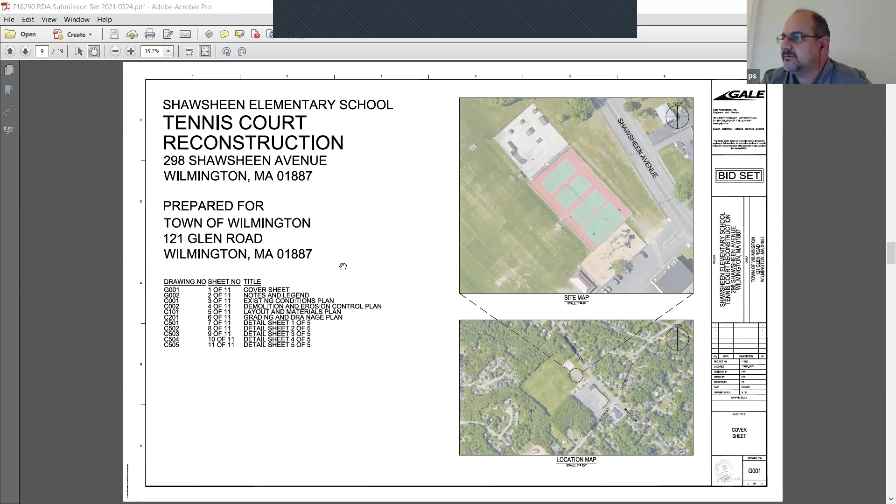So as Jamie said, the project itself consists of the tennis courts and a basketball court, as it is shown here today. It's right adjacent to the playground and skate park, next along Shawsheen Avenue, next to the Shawsheen Elementary School. The project itself is needed because the cracks have become worse and worse, and it's about time for a total reconstruction.

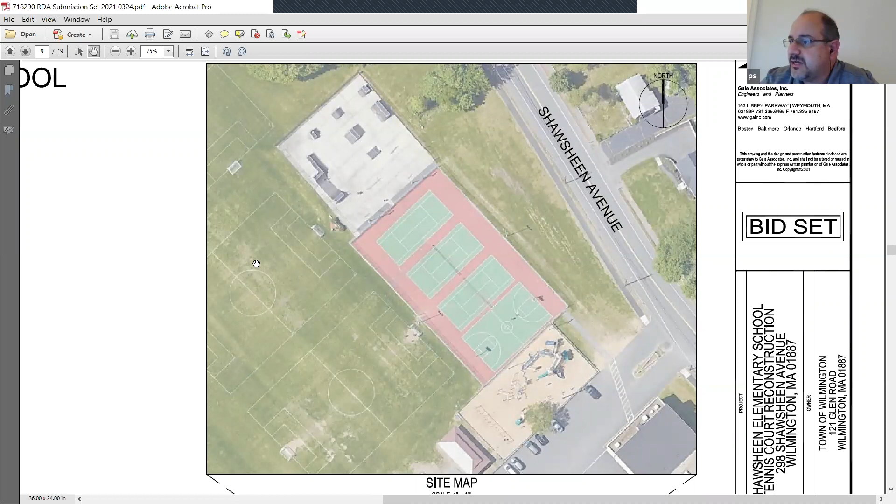The plans themselves, if I can show you the existing conditions of the site. So currently, these are the courts. Let me zoom in here just a little bit more, I just want to show you the contours of it. When they were originally constructed, they have some small insufficient area drains in the middle, and everything is crowned off the sides and bowled toward the middle.

That is not the proper way of constructing a tennis court. So in reconstructing this pavement in the same footprint, it would be our opportunity to make these courts sheet flow water as intended.

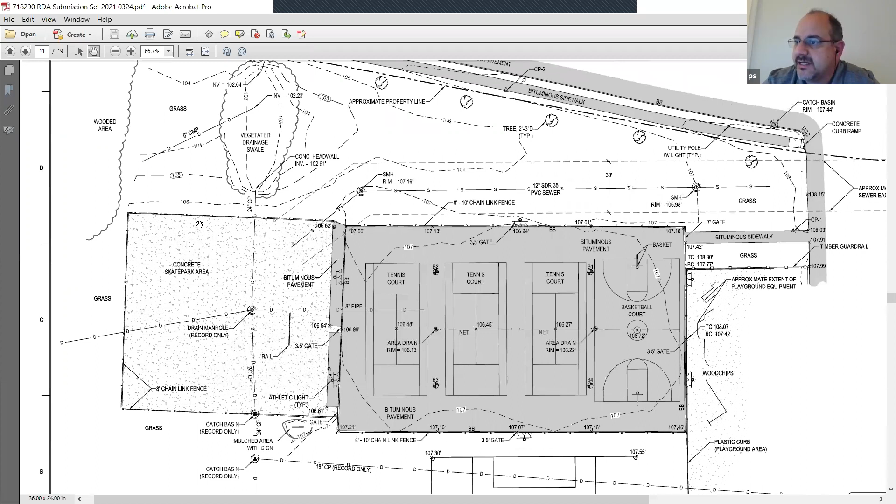The site picks up drainage, as you can see here, from existing 18-inch pipes. 24-inch pipes go underneath the skate park and discharge into the vegetated swale, as you can see here. It also receives several other inflows from other pipes in the area, and then at the end it overflows through a 24-inch pipe across Shawsheen into the other residential area, and ultimately into some wetlands there.

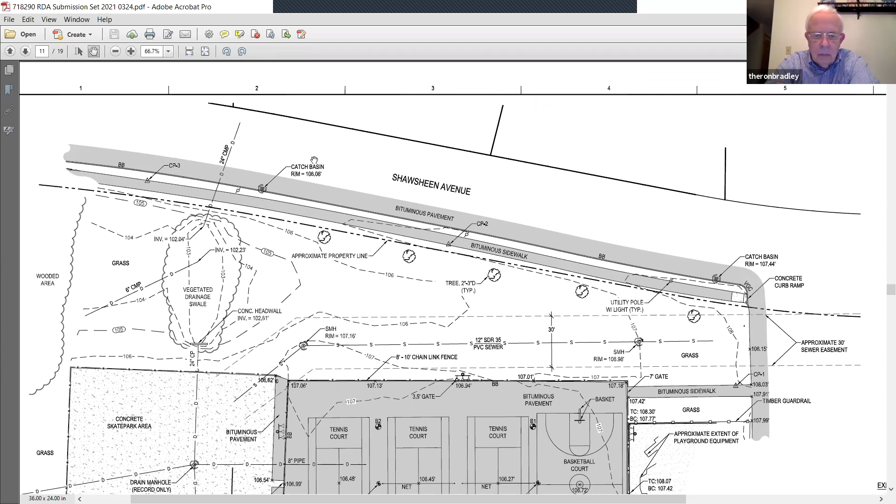If I would show you the next plan here, this is basically just showing the approximate area of disturbance. Again, the existing pavement is going to be pulverized in place, and then new pavement will be put on top. There'll be some new drainage installed as well.

We'll be putting some erosion measures all down gradient to protect ourselves from introducing any sediment down to that vegetated drainage swale. We would be introducing construction entrances, and this is a material stockpile area. It's put down here notionally — at the end of the day it's going to be field located during construction.

So the proposed conditions, again, within the same footprint, there's going to be a different layout. Wilmington wanted to have an additional basketball court, and so the tennis courts will be reduced from 3 to 2, and the basketball courts' footprint will be increased from 1 to 2. Again, all within the same footprint.

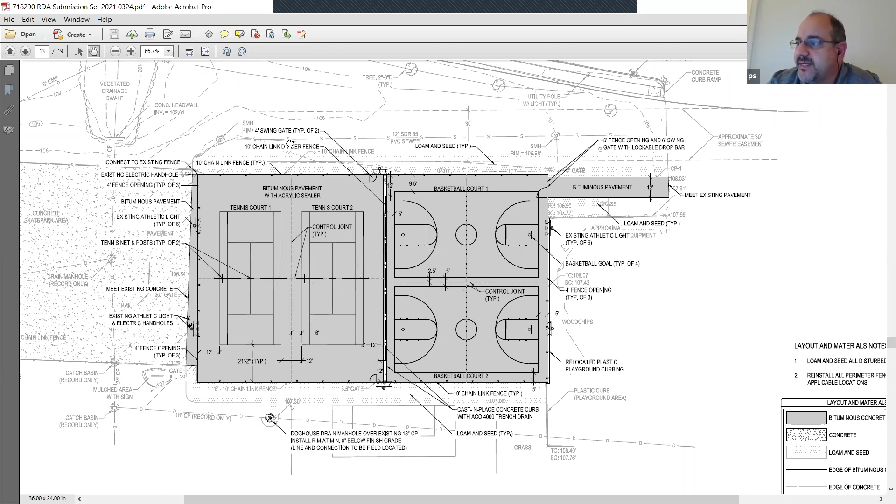There's going to be a chain link fence separating the basketball side from the tennis court side. As far as grading it, this is our opportunity now to grade the tennis courts as intended. The preferred grading for a tennis court is side to side; the next optimal choice would be north to south direction. Since we have this opportunity here, we are going to grade it from side to side.

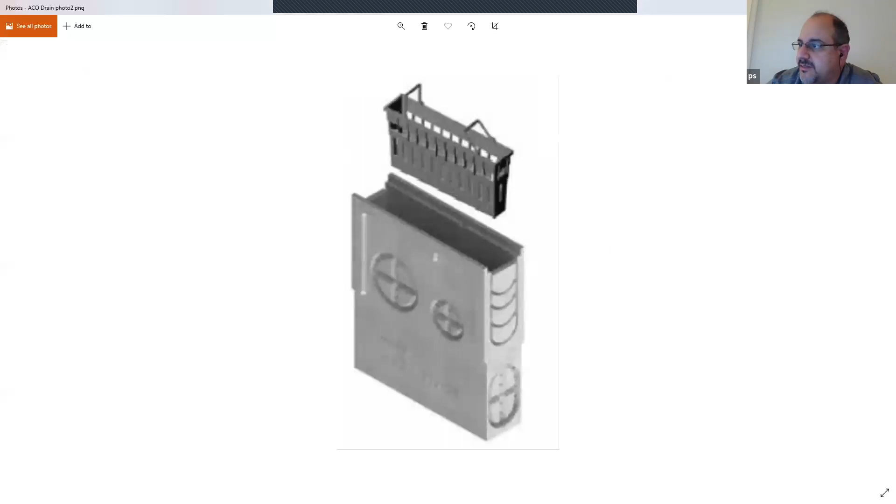Within this inline trench drain, there are some catch basins installed. They look similar to this — basically a little bit of a deeper sump, with an insert basket in it. It helps pick up debris, leaves, anything that people might leave on the tennis courts that may go and clog the drain lines eventually.

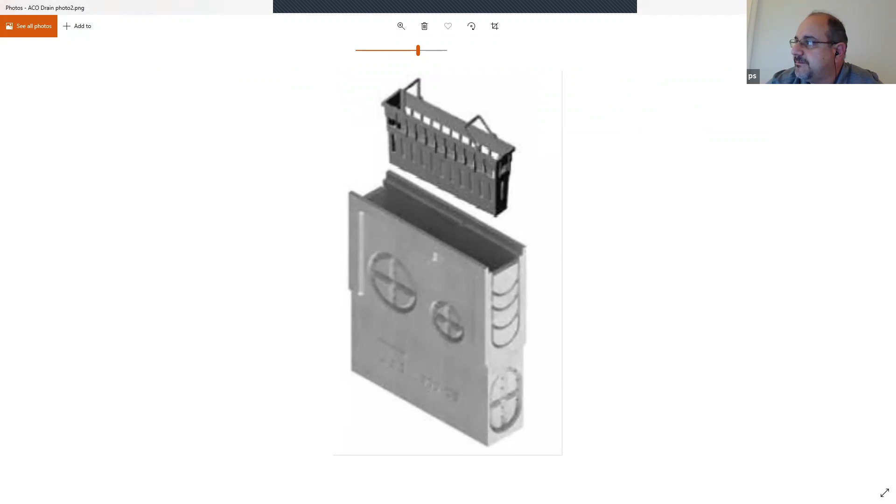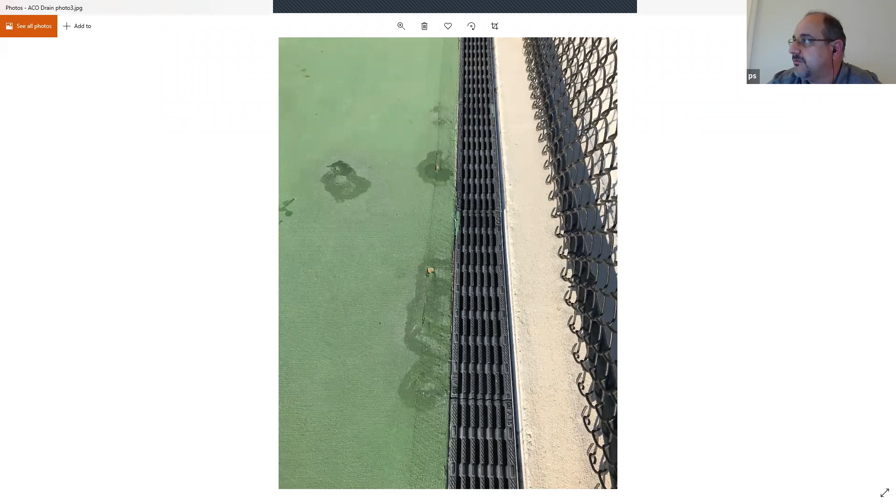It's part of maintenance. The way these trench drains work, they're really easy to maintain. These are HDPE covers — you have a little tool or screwdriver, and they pop out, and you can clean them. And then where the sumped catch basin insert is, that pops out as well. You pull the basket out, you clean it, and you go about your maintenance.

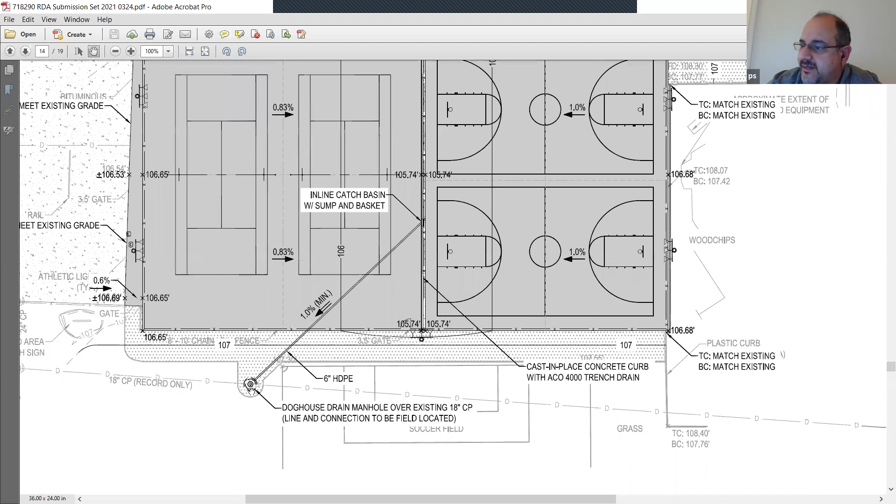From there, it'll drain from the east-west direction, if you will, from both the basketball side and the tennis side. It'll get picked up by the trench drain that's bisecting the two courts, then follow a drain line and connect into the existing drainage system, and follow its way around and discharge where the existing tennis courts discharge today, into this area right here.

Again, the limit of disturbance is within the same footprint. From the edge of this vegetated swale, if I was to take the tree line, there is approximately 150 feet of pavement within. If I were to draw a line from the nearest portion and go 50 feet out and expand it, there would be about 150 feet of pavement within that 50-foot radius. And if I were to expand it 100 feet from the edge of this tree line, it would be about 3,000 to 3,400 square feet of pavement within that 100-foot radius.

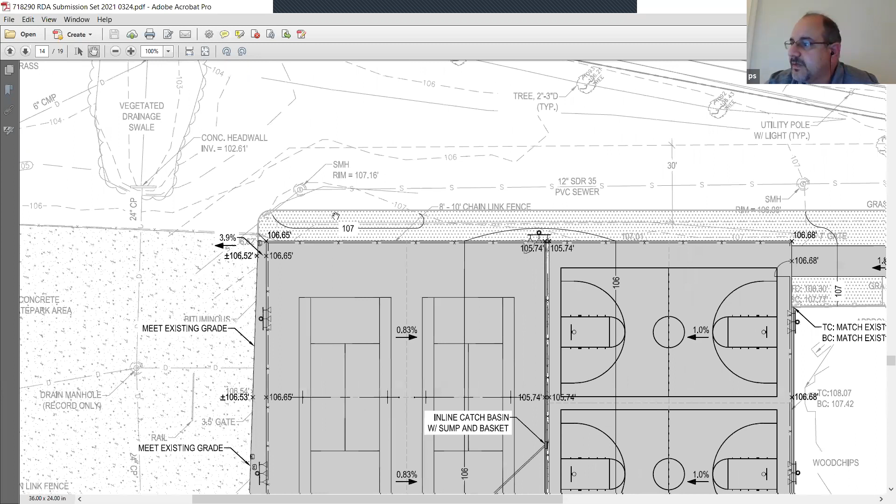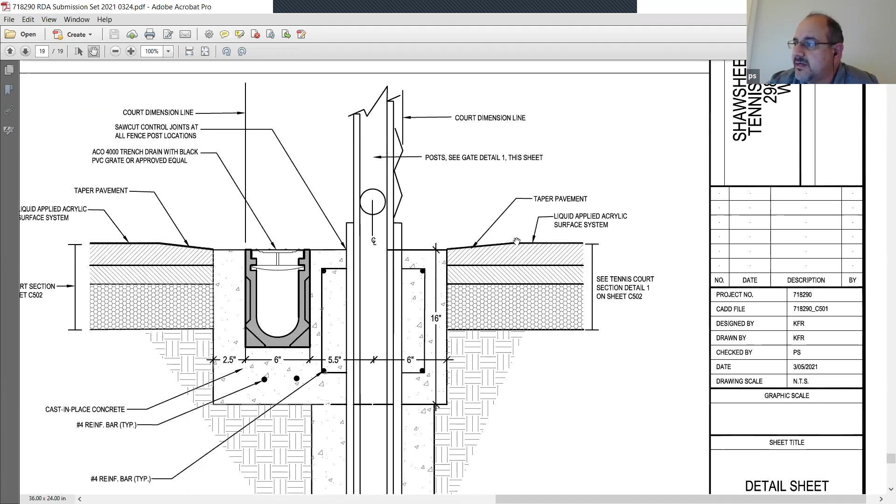I want to show again just a little bit more on the drainage of the courts. This is what it would look like in the profile view. Again, this is the chain link fence, bisecting the two sides, the two courts, and it's getting picked up by this drain. And this is what the plan view, or the cross section, looks like. There's a deeper sump here — this is where the catch basin basket insert will be installed for ease of maintenance.

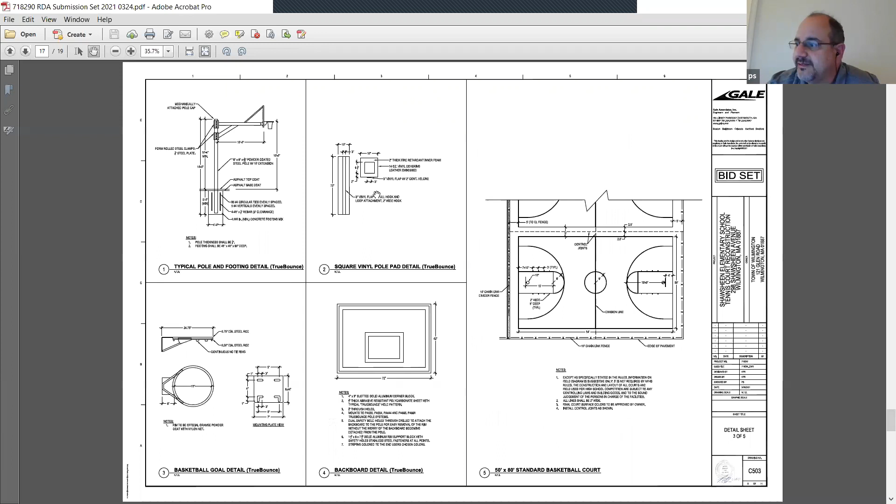That's pretty much the summary of it. If I can answer any questions, I'd be happy.

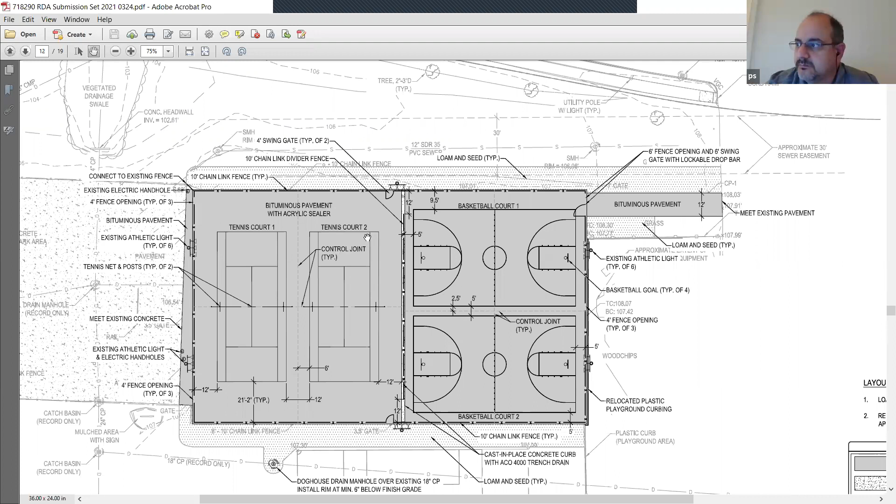Yeah, we just have two comments. The first is, I know you said the stockpile area is going to be determined out in the field once the work starts, but we just want to get that as far away from that vegetated swale as possible. So ideally on the other back corner. This corner here by the construction entrance? So the back, top left, bottom right, ideally away from it, towards the field.

Okay, we can definitely do that. Again, it's here as a placeholder, it's notional. It'll probably be a little bit smaller anyway.

Okay, and the other one we have is in areas where stakes can be driven into the ground, so obviously not across the pavement, we'd want silt fences instead of the straw wattles. You can't put the silt fence on top of the pavement, so straw wattles are okay there, but anywhere stakes can be put in the ground, we'd like to see that.

Okay. Yes, we are currently showing silt socks, not straw, so they can cut it open and leave it in place. But whatever the town prefers, if you guys prefer silt fence, whatever you want. So wherever, over grass or over dirt, silt fence would be appropriate, but anywhere else can be the silt sock.

Okay, that's not a problem. Cameron, can I just get some clarification on the stockpile location? Yep, I agree moving it's probably in the best interest. Could we consider moving it just to the right of the screen rather than putting it on the other side of the tennis courts where the soccer fields are?

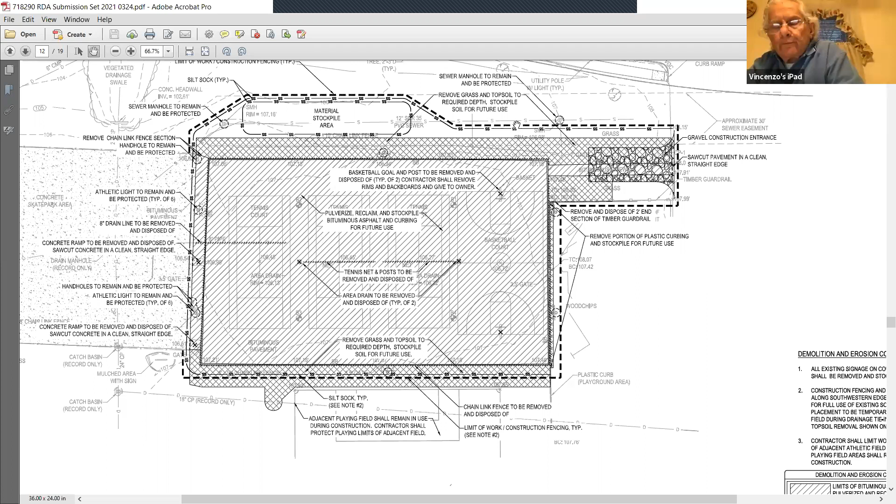Laura, no questions. Tom, no questions, but I never like reducing the number of tennis courts. Right, Cameron? You gotta protect those courts.

Mike, do you have any questions? No, but I want to counter Tom by saying one of them should be pickleball. Oh, we have six brand new ones over there, don't we? At the town hall, yeah, there's three brand new ones. We actually went over that possibility with the rec department and the school department, and we've concluded that we're going to leave the ball courts at the town hall for now and keep this as tennis.

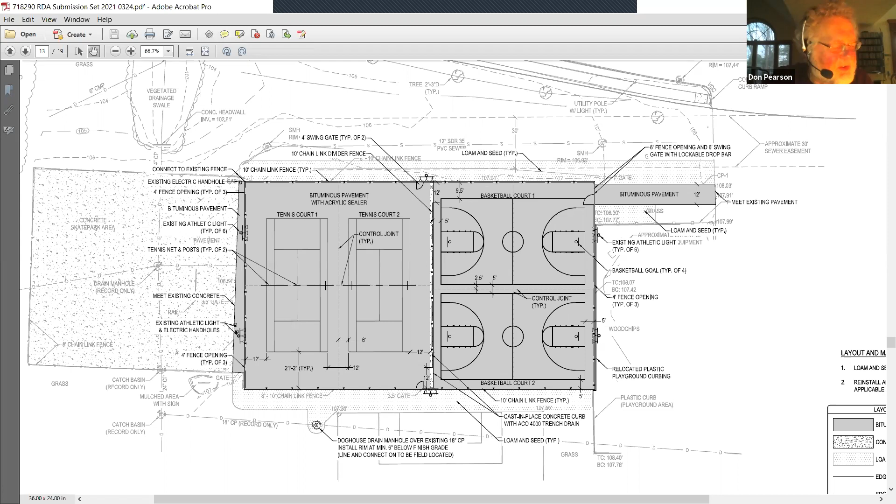Okay. So seeing no hands and hearing no voices, I think we're ready to look for a motion to issue a negative three determination for 298 Shawsheen Ave tennis courts and basketball courts.

And Mr. Chairman, if I could maybe just suggest to the commission, if we could put just the condition in there that the stockpile location and erosion controls be approved in the field by the conservation agent. Okay.

Anyone like to make that motion with Valerie's addition? So moved. Thanks, Ron. A second? Second. Vinny seconded the motion.

To the vote: Vinny, yes. Laura, yes. Tom, yes. Mike, yes. Alex, yes. And I vote yes as well.

This is Ron, I'll also vote yes. Did I get you, Ron? I made the motion, but I had to vote on it too. Okay, yes, sorry I missed you there. You vote yes as well, right? Yes. Okay, thank you.